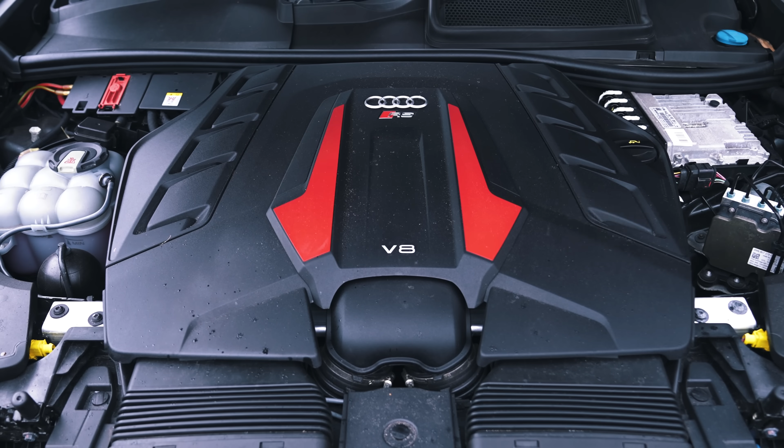Is your car going to make good power though? I'm here to see and find out. Put it to the test. Underneath the bonnet, you've got a 4-litre twin-turbo V8, supposed to have 600 horsepower. How are you going to feel if it's making under what it's supposed to? I'm going to be disappointed, I am, in Audi, to be honest, on their manufacturing information. Okay, well, we're going to find out if Luke is going to be disappointed. Let's power it up.

We've got Luke sat in there, not letting him see the power figures. I want to reveal them to him later. Will they be a shock or a nice surprise? He looks nervous.

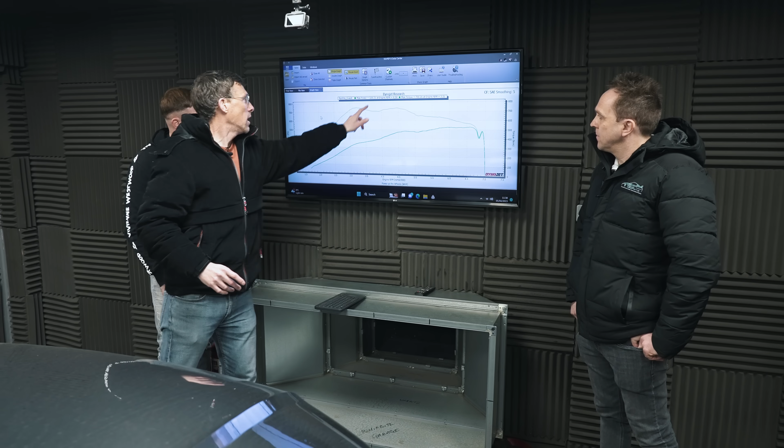Okay then, Luke, now comes the moment of truth. So we've run your car up a few times, and as you can see, this is your power curve, that's your torque curve, and your max power is supposed to do 600. I'm afraid to tell you, mate, just 530, you've lost 70 whole horses. You've got a really crap Audi RSQ8. I would sell it immediately.

How disappointed are you? Embarrassed, I think. I'd be very embarrassed, I'm pretty embarrassed. You know, it's more like the Audi SQ8, not the RSQ8. I wouldn't even put it that far. But I'm actually lying to you.

You see, this dyno obviously measures at the wheels. In fact, all dynos measure at the wheels. There has to be a calculation to work out what the power output would be at the car's flywheel, which is what the manufacturers measure. And when we put that wheel horsepower figure through the calculator, Paul from WiFBits, who are doing the dyno testing here today, what is the calculated horsepower at the engine? 643. 40 horsepower over what it's supposed to do.

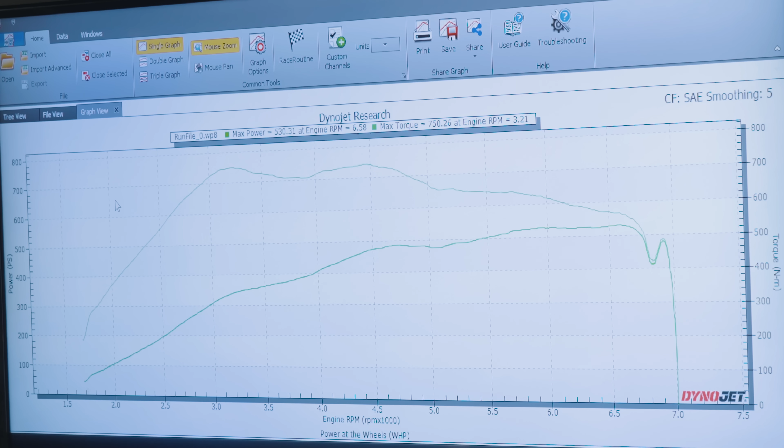So this seems like quite a strong car, doesn't it, Paul? It does, yeah, it's making good power. Torque curve, which is obviously this. Talk us through the torque curve. It looks a bit lumpy. It looks like the Himalayas, yes. This is a big chunk missing here. I'm not sure why it's doing it, could be inlet air temperatures and knock. Do you notice that when you're driving around, like halfway through the rev range, it's a little bit off the power? I couldn't say so, no, it just feels strong. It's strong, it's naturally strong.

It's going to be interesting to see how the others do, especially the ones that have the same basic engine, see how close this can run them. I actually think the RSQ8 is a really good shout because it's less expensive, it's really nice inside, yet you've basically got the same tech as those two more expensive cars. We're going to see how they do in a moment, let's do it.

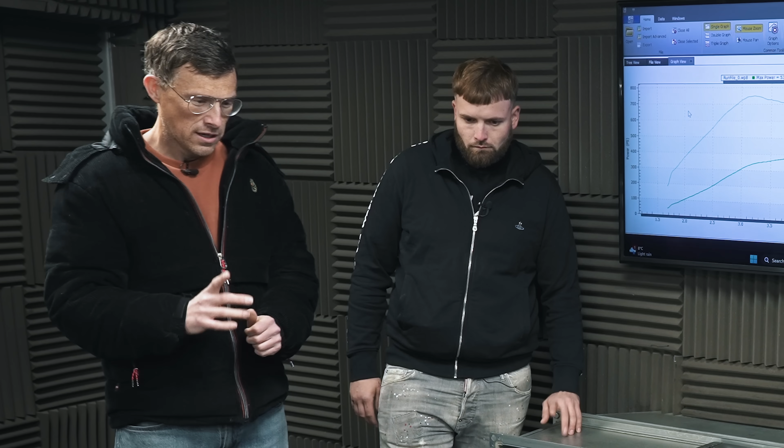Now, power is only half of the performance equation. What is the other half? Weight, it is weight. So we've had your RSQ8 on the scales, thanks to Scale Smart, we've got Dylan over here. So this car is supposed to weigh, according to the manufacturer, 2,315 kilograms. What does it actually weigh? The actual weight is 2419. Okay, that's with a full tank, and manufacturer's figures actually have 90% of the tank full. So when you do the maths for that, what's that? 2412.

You've got a lot more power, but you've got more weight too. Still, it's over 266 horsepower per tonne, so you're still winning, not by as much as you thought, but you still are.

So this then is a good RSQ8, and you can actually rent it, can't you? Yeah, rent the box car rentals, get at them on Instagram.

Right, so let's move on to the next car and see how that compares to the Audi.

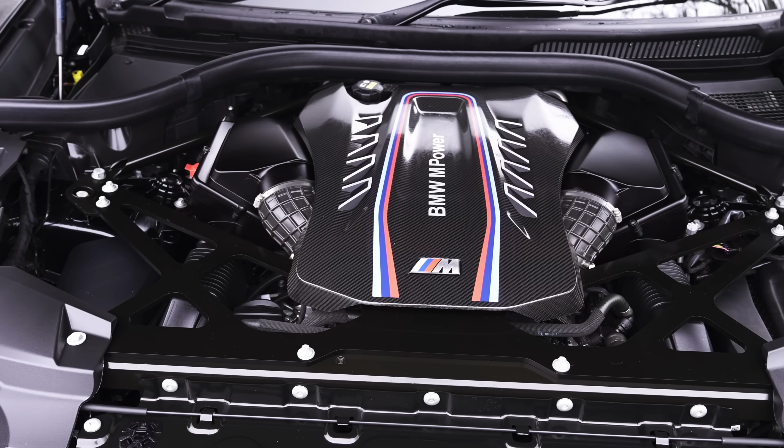Next up, we have a BMW X5 Competition sent to me by Roadstar, a prestige car dealership in Coventry. This thing has a 4.4 litre twin turbo V8, which should put out 625 horsepower. However, BMW is famous for lying about its horsepower figures, often understating them. So let's find out what the truth is with this car.

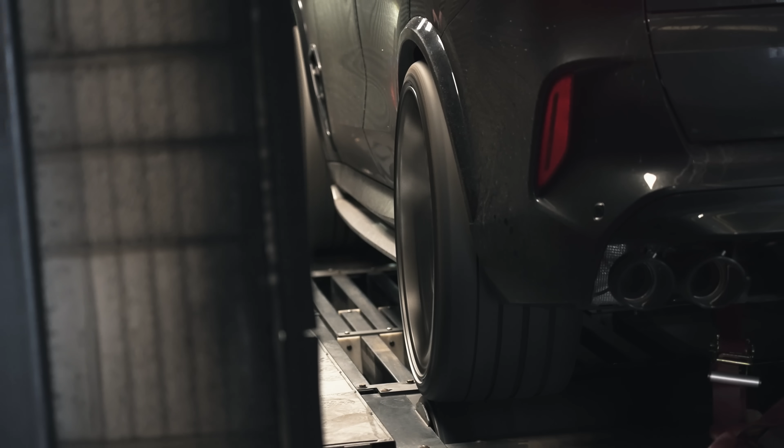We've got the results now on the BMW X5. I haven't seen them yet, I'm not looking. But based on my experience with BMWs, I'd say it's got more power than the Audi. It's claimed to have 25 horsepower more, so I think it should be better than the Audi, even though that was doing more than it was supposed to. So let's find out, Paul.

So, wheel horsepower, it's got to be more than 530, which the Audi had. Wheel horsepower is 552. BMWs, honestly, absolutely smash it. When you put it through the calculator to account for drivetrain losses, we can get a rough estimate of what it's putting out at the engine: 669 horsepower. Wow, that's a lot more, isn't it?

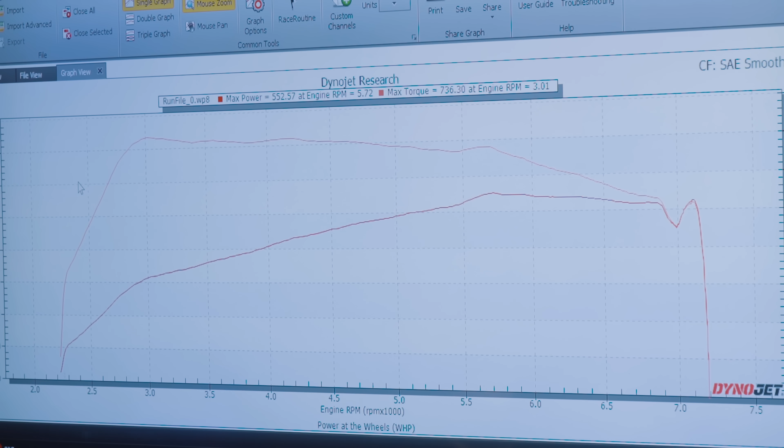And interestingly, looking at this torque curve compared to the Audi, that is better, isn't it? It's much better, much smoother. There's no big dips. Do you know what I like? I like this little pickup at the end, which gives you a bit extra as you're getting up the rev range. Oh, we're not done yet!

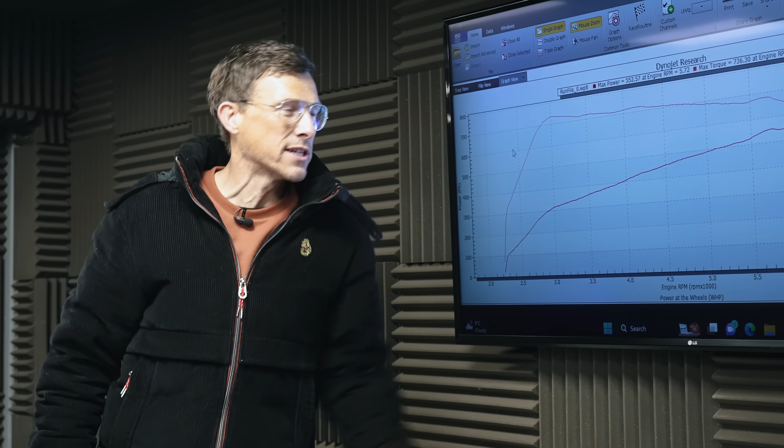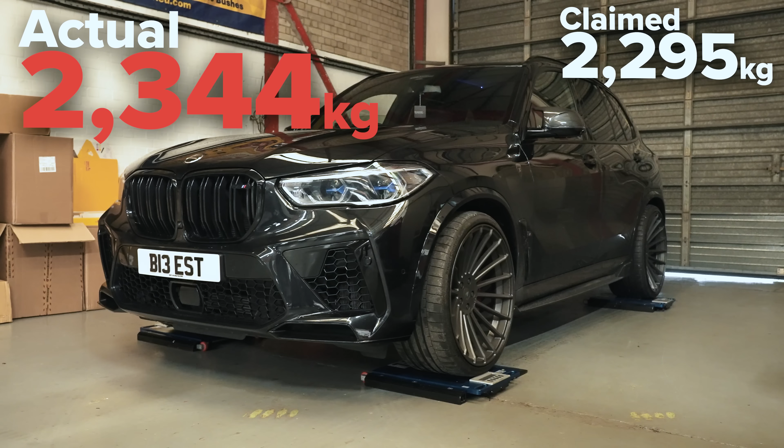Anyway, could all be undone if it's a bit overweight. Let's get on the scales. How much does this BMW X5 weigh? So it's 2351. When you account for fuel, 2344. So a bit heavier, but not loads over.

Now the claimed power to weight ratio is supposed to be 272 horsepower per tonne. Doing the maths based on what it actually is comes out at 286 horsepower per tonne, so 14 horsepower per tonne over what BMW claimed, which is a bit better compared to the Audi, which was 6 horsepower over what Audi claims. Yeah, BMW definitely lie more about their figures.

Time for the next car.

Next up, we have the Porsche Cayenne Turbo GT. It's owned by Tommy here. How do you feel about this? Do you think it's going to do the numbers? Well, I think that Porsche understate their numbers all the time, so I think it's going to do a lot higher. Maybe not a lot, significantly higher.

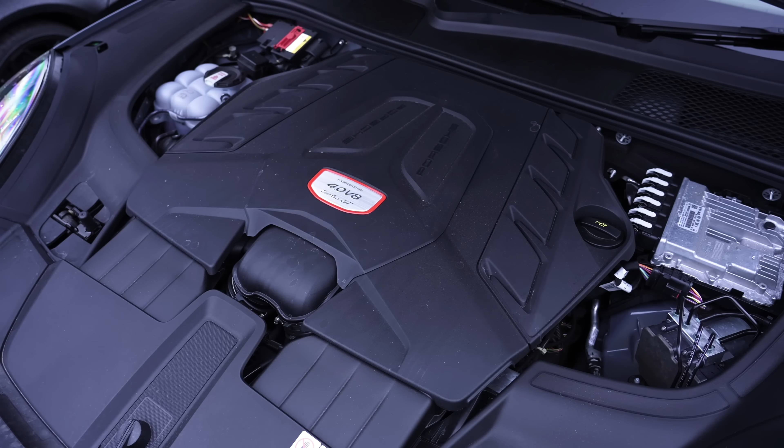This has the same 4-litre twin-turbo V8, 8-speed automatic gearbox, and I think the same 4-wheel drive system as the Audi RS Q8. It does. Yet Porsche says this one does 640 horsepower. It's got to make sure that it's got that significant gap over the figures we got for the Audi. But it's been tuned by Porsche's GT division, with upgraded turbos and some other bits and bobs, so I know it'll be doing better.

I'm going to say it, I know it'll do better, and it'll definitely beat the BMW as well. I'm not sure, because that surprised me. Yeah, because that's got less power than this on paper, but I don't know if it's going to work out like that in reality. Let's get it on the dyno and see what it actually does.

We've got Tommy in the room there, doing some body popping. We can all do that. We don't know what he's doing.

I'm going to go find out in a moment. He seems quite confident though, doesn't he? Let's see if we're going to wipe that smug grin off his face.

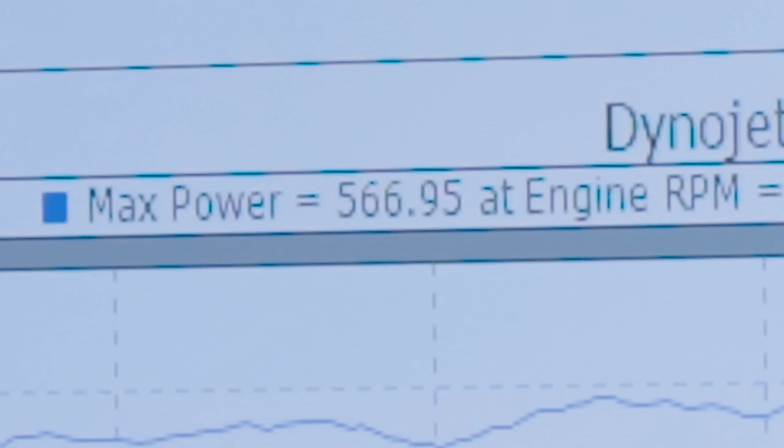So, Tommy, you were confident about this car's performance, and here's the graph. Wheel horsepower, 567 horsepower at the wheels.

So, Paul, when you went through your calculation to account for drivetrain loss, what do you reckon it is? 686 horsepower. Porsche never let anyone down, so I'm happy with that.

So the difference between it and the BMW is kind of what you'd expect, what the manufacturer's difference is. It's all coming out in the wash. They are producing more power than we think, but it's spread equally. But the most interesting thing about this, you know, it's got the same powertrain as the Audi pretty much, but...

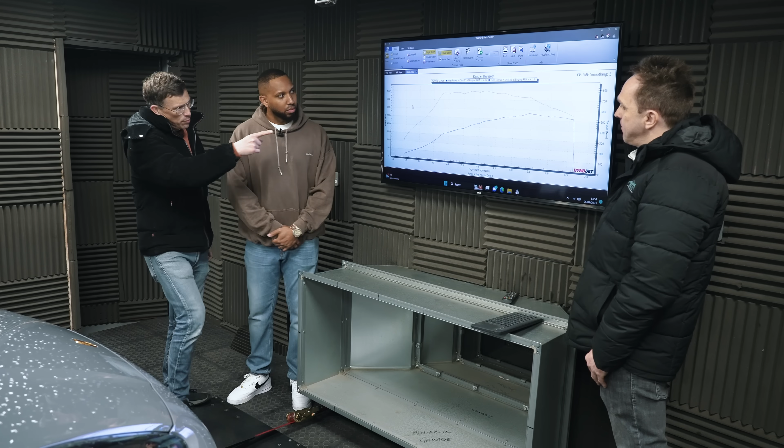That torque curve for this Porsche is way better, isn't it, Paul? Yeah, lovely smooth torque curve, exactly what you want. Porsche engineers know what they're doing.

Let's see on the scales though. It's supposed to be a GT car. Let's see if it's a GT car or not. It's not going to be. No, it won't be. So, Tommy, you're really happy with your car's performance?

Yes. But what about its weight? Well, let's see what it's saying. I'm not sure. Cars tend to be heavier than manufacturers say these days, so I'm curious to see what it is.

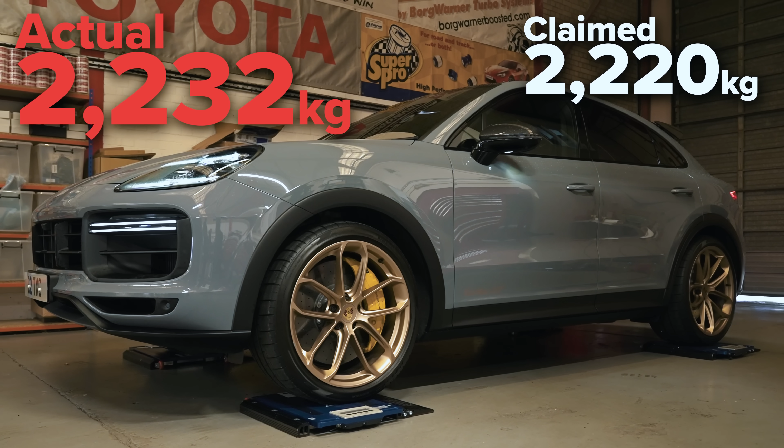Well, Dylan knows. You see, Porsche claims this thing should weigh in at 2,220 kilos, but Dylan has found out that it weighs 2,239, and when you account for the fuel element, 2,232. That's only 12 kilos over.

That's actually not bad. Have you just left some things in the glove box or something like that? I've got my Fruit Pastilles in there. Yeah, Fruit Pastilles. And my coat. And some money. Yeah, some bloody money. It's all paper, it's light.

When you did the maths based on the car's official figures, the power to weight ratio is supposed to be 288 horsepower per tonne. What this car is actually doing is 307 horsepower per tonne. I mean, Porsche, man, you can't doubt them. You've broken the 300 barrier, which is really, really impressive.

I'm not sure that the next car is going to beat this, even though really, considering the price and the stats on paper, it should do. It's going to be interesting. Finally then, we come to the big one. It is the Lamborghini Urus Performante, owned by my friend Mark McCann here.

Friend? Yeah, you're my friend. Look, never called me that before. Yeah, that's a bit weird. That was awkward. It was very awkward.

It's going to be awkward when we find out the performance of this car because, you know, that Porsche is supposed to have 26 less horsepower than this - 4-litre twin-turbo V8, same engine, but in this, 666 horsepower claimed versus 640 claimed in the Porsche, and we've seen what it actually did in reality. Is it going to be 26 horsepower more in reality?

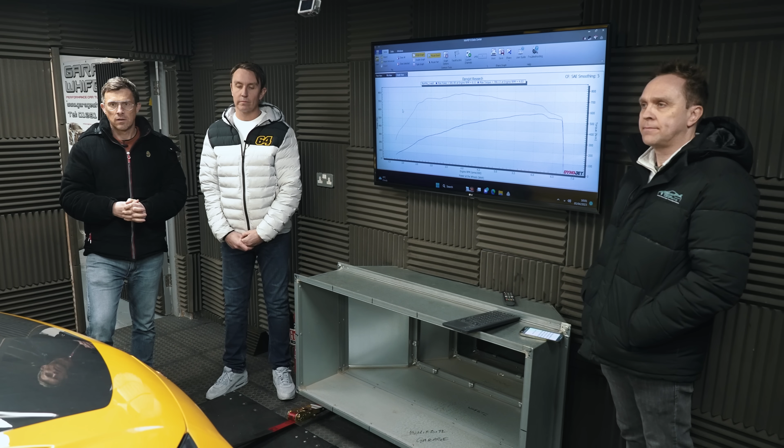Right, Mark, moment of truth then. Feeling confident? Yeah, I have faith in the Italians.

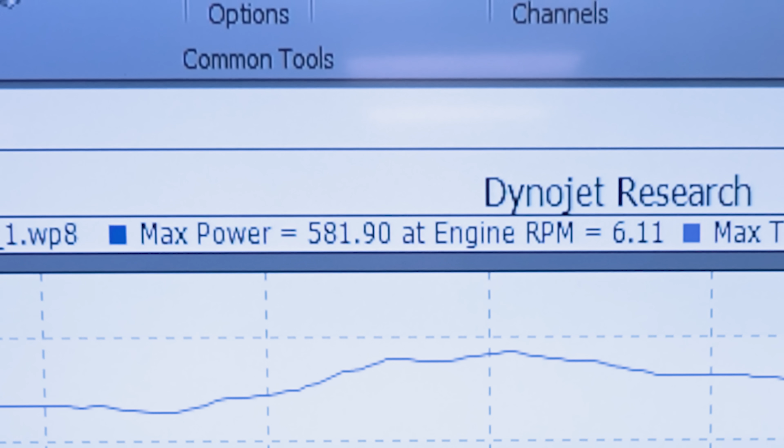Well, yeah, right to have faith in the Italians because, well, horsepower - what are you getting there, Paul? 581.9, I'm going to round that up to 582, come on. Which is 15 horsepower more at the wheels than the Porsche. Brilliant. So it is more, but it's not the 26 horsepower more.

However, let's do the calculation to account for drivetrain losses, because maybe that'll make a bit more of a difference.

Go on, so what's the actual horsepower that we think it's got at the crank? 704, which is 18 horsepower more than the Porsche. So I win. You do win, but the difference isn't quite as much as Lamborghini are claiming.

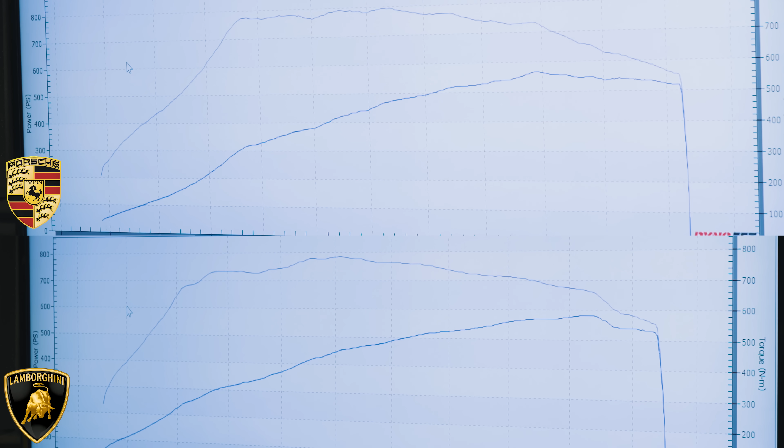I'm not trying to be negative about your car, just to wind you up. No, I'm not jealous. The torque curve on the Porsche is slightly smoother, isn't it? You haven't got that dip. You see that bit there, Mark? That's me coming past you in a drag race. That's when that happens - it looks like my mum's blancmange, just sagged. But still, decent numbers.

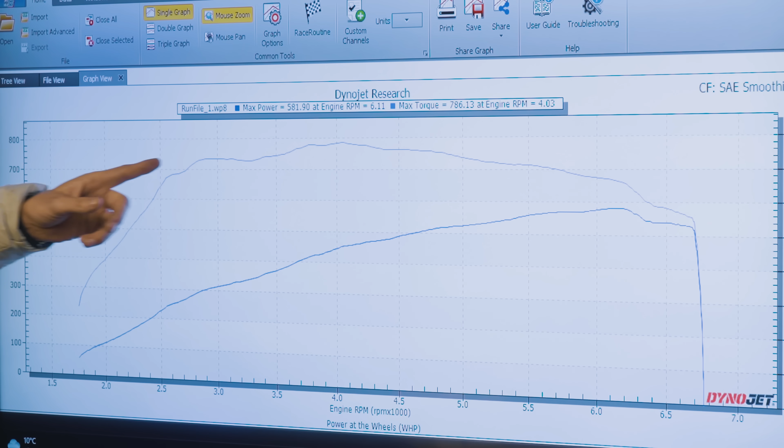So you're saying that's my excuse there? That's your excuse, that dip is your excuse. Whenever you lose, just go, oh, it's like the dip in my torque curve. So every time I do lose, we can just put this on the screen with editing. Exactly, we'll do that. Let's get on the scales, see how heavy it is or isn't.

Mark, your Lamborghini has the most power. It's also supposed to be the lightest. Lamborghini claimed 2,150 kilos. Do you think it's going to be the lightest now we've got it on the scales? It's got a lot of carbon on it, hasn't it? Did you have to pay extra for the carbon bits? The bonnet's standard, isn't it?

Yes. I do know you had to spend 70 grand on options, didn't you? Didn't the Lamborghini man spec it for you? Yeah, having an early car, I had no choice. I could either wait and spec it, or have this one new. So matey trigger finger was like, yep, we'll have them, and charge a fortune. And mugs like me who are desperate for the first car. Yeah, you paid the money, but it holds its value completely, doesn't it? Definitely. So it's not irrelevant, but it sort of is irrelevant because it's still made money.

I think we're getting a little bit lost here, let's just focus on the weight. It's supposed to be 2,150 kilos. Dylan's put it on the scales, and its actual weight is 2282. What is it when you account for 90% fuel? 2275. Wow, so it's actually heavier than the Porsche. But don't worry, just done the maths - the power to weight ratio of this is 309 horsepower per tonne, which beats the Porsche's power to weight ratio by 2 horsepower per tonne.

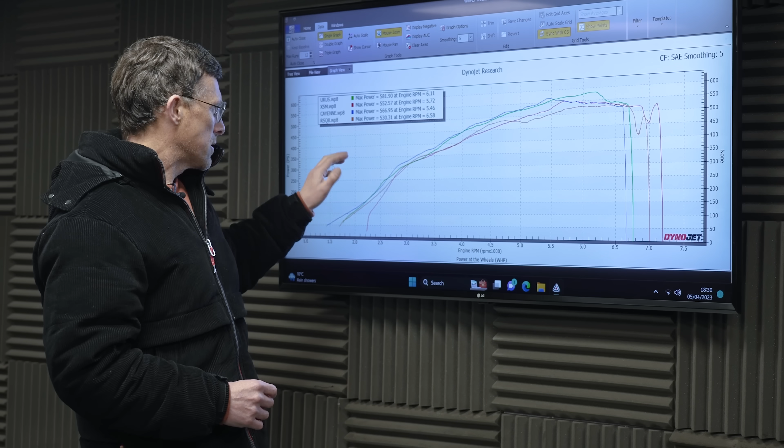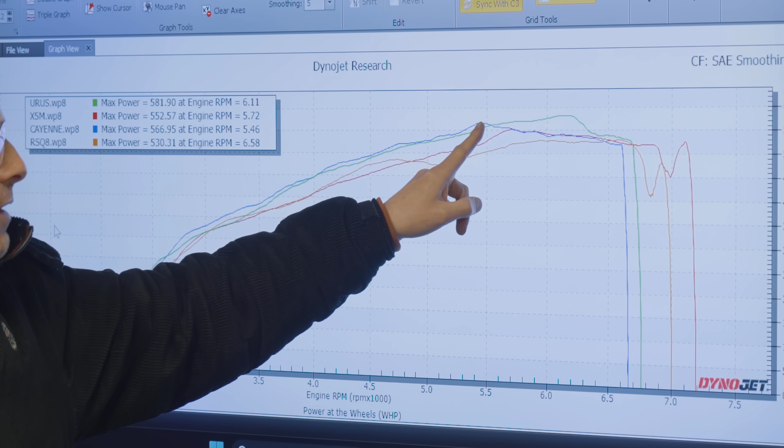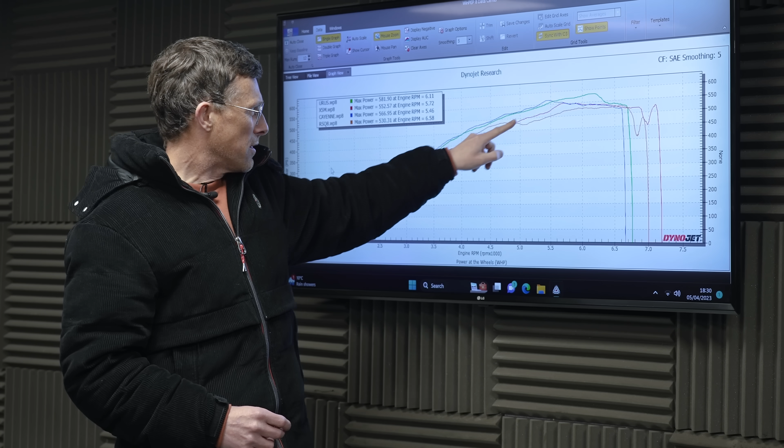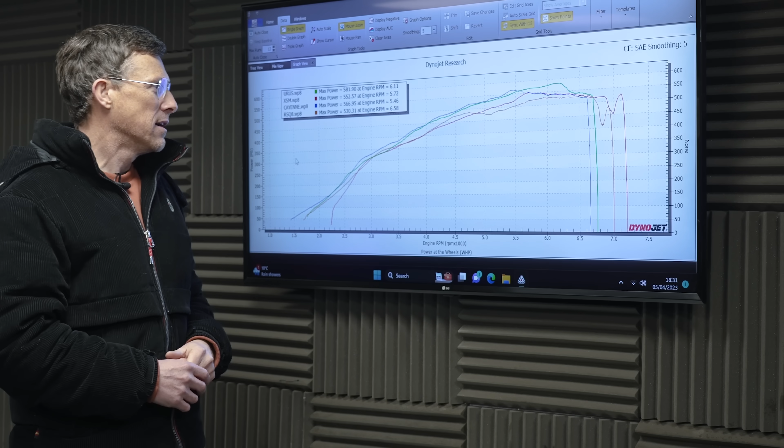I thought it'd be interesting to compare the power curves of the 4 SUVs, so I have them here in 4 different colours. What's interesting is that for most of the rev range, the Porsche Cayenne Turbo GT has more power than the Urus. It's only after the Porsche peaks out at just 5,500 RPM that the Urus keeps building to a slightly higher power output, all the way over 6,000 RPM. In fact, the Porsche peaks soonest, followed by the BMW, then the Urus, then the Audi. But for most driving, when you're in this part of the rev range, the Porsche actually delivers the most performance. It's only when you really rev it out that you get the benefit of that Lamborghini Urus Performante. But really this game is all about the peak figure, and the Urus does deliver the most power.